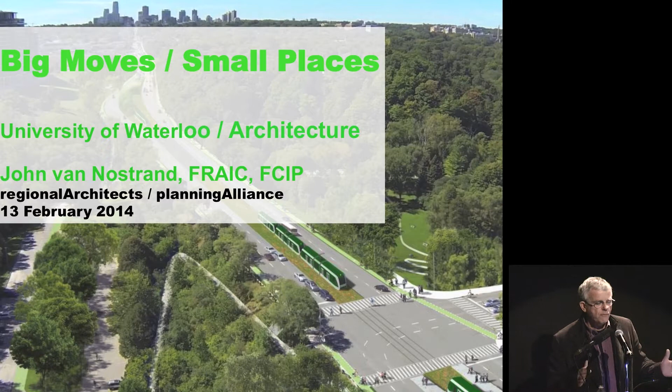So I call the talk Big Moves, Small Places. The regional transit plan is called the Big Move for our region—that's at one end of the spectrum, and at the other end are the actual places and properties affected by this. The whole project vibrates back and forth between these two scales.

This isn't a project done by my firms alone—Planning Alliance and Regional Architects—we also work closely with a firm called Brook McIlroy and with Antoine Grumbach from Paris. Those who know the T3 in Paris will be familiar with Antoine; he's the architect and urbanist who developed the T3, the new LRT around the perimeter of Paris, a pretty amazing piece of infrastructure. Antoine also taught me architecture in 1968, because all the serious young thinkers in Paris had to get out during the student riots, and he ended up, fortunately, at U of T for a couple of years. So we've known each other a long time, and I worked with him in Paris as well.

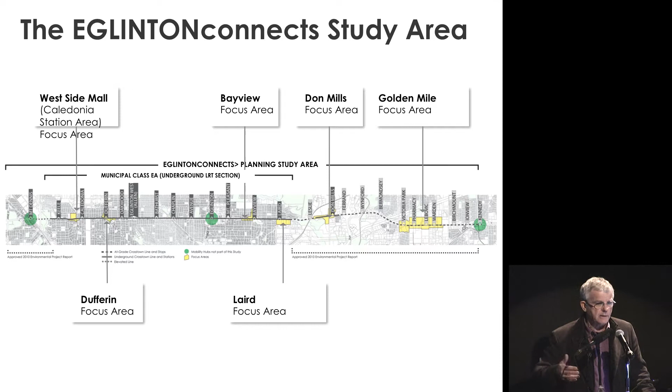It's been about a year and a half, almost a 2-year process, and is concluded now and goes on to the next stage, which is for Infrastructure Ontario to take it and develop the detailed plans and construction documents to build it.

The other reason I thought this would be worth showing you is to give you a sense of how projects like this get created and realized, and how they're represented to the public, just as a kind of exercise.

So when we talk about vision, it's an idea that will change along the way. We don't treat it as a fixed thing. So vision, testing our initial ideas, refining those, and then producing a final report.

And just to give you a sense of the politics of it—Toronto is of course fraught by politics—we deal with 12 or 14 different wards and different politicians, including some who are running for mayor now, and quite a spectrum of interests from a political point of view, not to mention a neighborhood point of view. So one of the things we did is have open houses inside City Hall, ironically for councillors, so they could drop in and see, up on the second floor of City Hall.

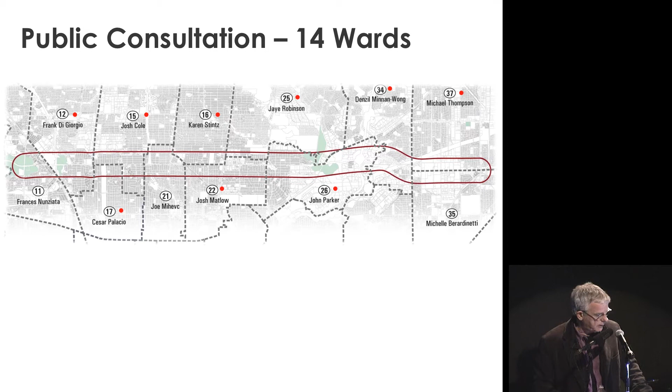And again, to be clear about the roles—who's actually building this, who's responsible for what. Metrolinx is responsible for the LRT, the design and construction of the LRT itself and of the stations, with some input from the city, especially in terms of the interface between those and what the city is responsible for, and what we were responsible for—the planning and design of a new public realm.

And streetscape, a transportation study from Black Creek to Brentcliffe, to look at the impact of the new LRT on existing traffic movement on the surface, planning tools for the focus areas, and the creation of ideas about zoning in a form that could be translated into a revised zoning bylaw. So quite an interesting mix of responsibilities.

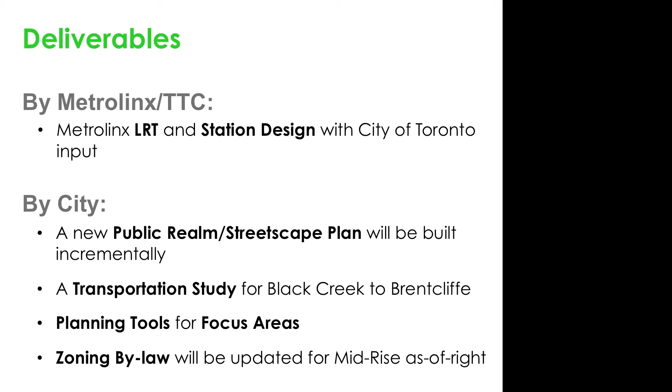It will probably redefine the way we talk about the city, because as you know, the city is either east of Yonge or west of Yonge at the moment—that's how people describe Toronto. Now we're going to be east of Yonge, west of Yonge, southwest, northeast of Yonge and Eglinton.

And in fact, at a regional scale, it runs from Lake Ontario right to the Niagara Escarpment. So it's a very important corridor, as we'll see in a moment, not just in the neighborhoods it runs through, not just the city, but also the region as a whole—hence Metrolinx's involvement at one level along with the city.

One of the pieces of work we did was on the history of the development of Eglinton, which has evolved from a country road between concession blocks, between two townships, into an urban main street. It spans the city from east to west, linking the Humber to the Don Valley.

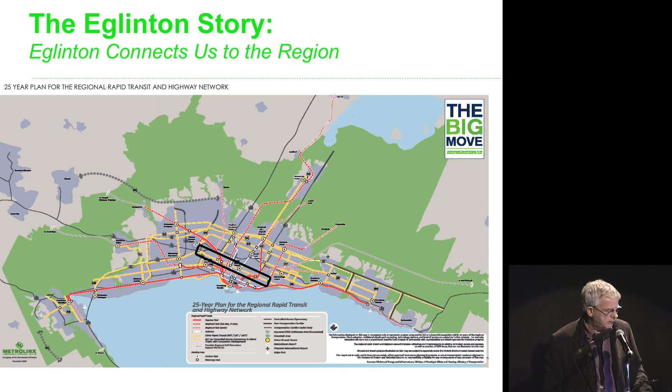So it has a very large-scale role for the city as a whole. You can see the black lines are existing subways or comparable order transit, and the red is Eglinton.

The dotted lines show where it goes above grade. At a city level, it's running from the lake over to the airport eventually, and the west end of it is actually reserved to widen out as a parkway to the airport, becoming a second major access into the airport at that end.

So the Golden Mile, the eastern end, the famous Golden Mile in Scarborough, right into Yonge and Eglinton, which is really one of the major hearts of the city, through Leaside, through Forest Hill—all of whom, at the BIA level, are busy trying to define the differences between their neighborhood and the others. So there's a kind of differentiated character that picks up too.

So at one end you've got a question of language here, because transit always raises this: the original Yonge line was built in a very consistent language of materials and design, using the same colored tiles, similar fixed sets of words, if I can call it that, to paint the line as a whole.

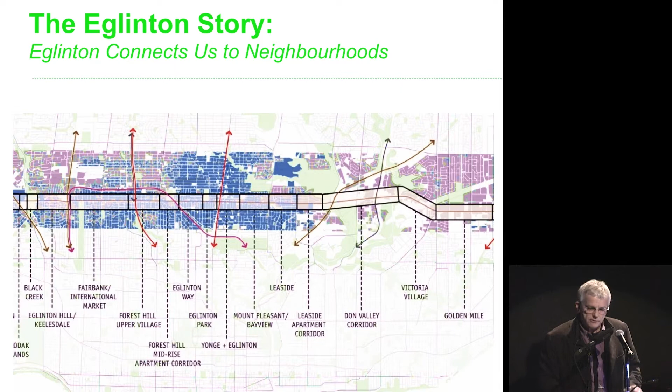And I think the challenge before us here is to try and do both at this level. That's what we're actually talking about.

So there's the sort of neighborhood scale street that we're dealing with, the DNA, if I can call it that, of the main street of Ontario or Canada for that matter.

That's currently under construction. They've been boring from one end, and we'll start shortly boring from the west end eastwards, and we'll start at the east end at Brentcliffe near Wilket Creek, boring westwards, joining somewhere in the middle.

You can see that this also paints its situation within the topography of the city. So you've really got a kind of two valleys at either end rising up to the high point, or the divide that happens actually in Forest Hill, hence Forest Hill.

We think that what we've always thought from the beginning is that this is not just about transit and service, it's also connecting us with our landscape. It's more, there is that magic moment on the Yonge and Bloor lines when you burst out from underground and come in through green, and then burst back in.

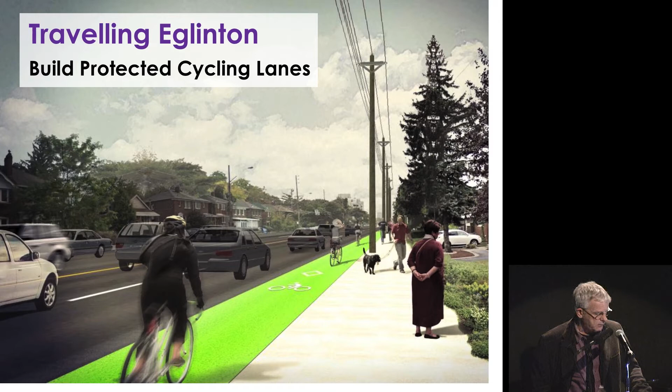And how could we widen the sidewalks and improve the pedestrian space throughout? And how could we not only provide for biking, but provide for protected cycling lanes throughout? Also, the other challenge was to maintain the existing parking supply.

One of the problems with one of the precursors, which is the St. Clair line, is that parking got eliminated from the street, certainly during rush hours, but got severely reduced overall, which is a hugely contentious issue with shop owners along the street who lost customers, and many of them still complain that they are. Unlike the Bloor line, where the train was offset, so there was a whole network or linear set of parking lots that complement Danforth and Bloor throughout, which is quite a different situation.

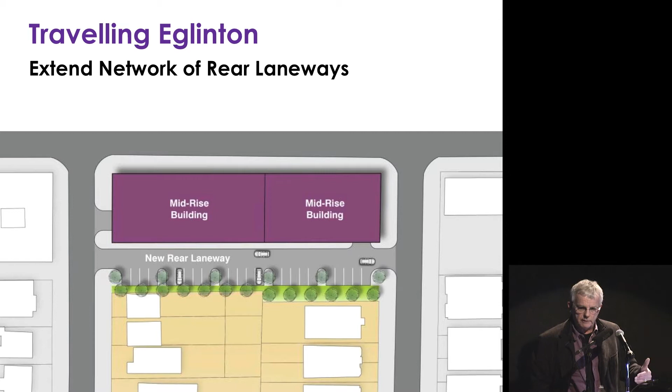So we made a commitment to maintain the existing parking supply along the street as a whole. One of the ways we looked at doing that was to provide new lanes and new parking behind the existing buildings to complement, and there were still spaces in front as well, but to sort of keep that ratio up. This just gives you diagrammatically what's really going on.

There's a typical existing cross-section of Eglinton as it is. Basically it has 2 bus-only lanes through most of its length, and then 2 travel lanes, and the center turn lane, and relatively narrow sidewalks once you've got all the furniture into it.

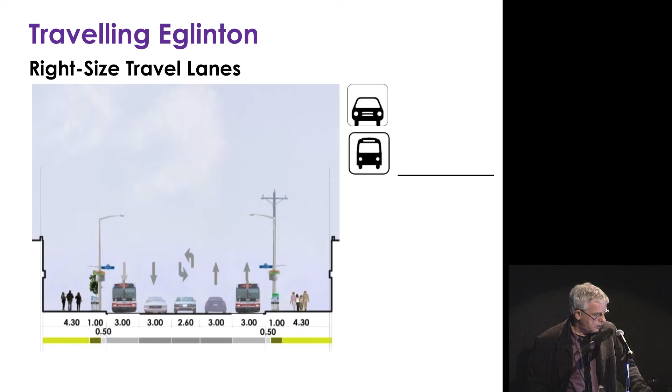So first of all, just to give you a sense of traffic, this is numbers for the AM period, what number of people are being accommodated. In cars, you're getting 700 to 1,300 people per hour being accommodated, and in buses, 1,200 to 2,600, for a total of 2,300 to 3,600.

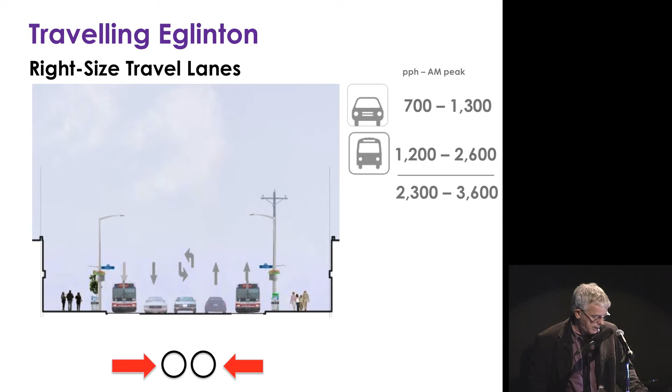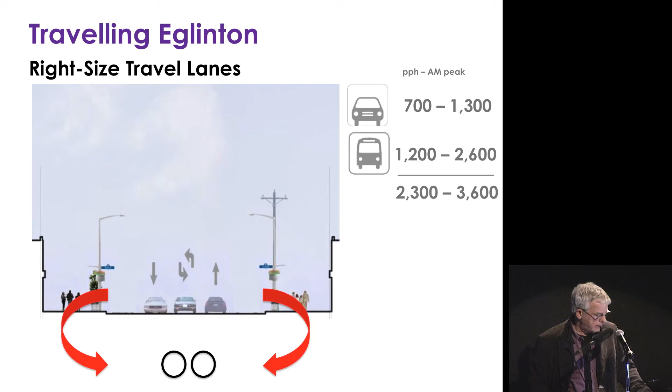Then, with the introduction of the LRT underground, that means we can eliminate the buses. There will still be buses on some portions linking through certain areas, but basically we're getting rid of the bus lanes because they're being replaced by the transit. And that also then allowed us to begin to look at widening the streets.

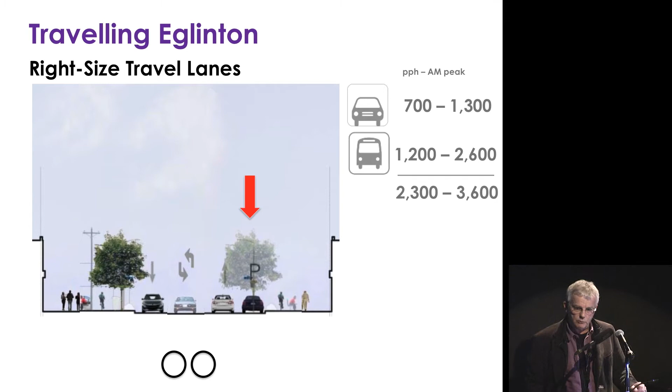This is something that had previously been done - one reason we were selected for the project is that we were responsible originally for St. George Street, which widened the sidewalks and reduced the travel lanes. We did traffic counts there that included pedestrians, as were done for Eglinton, and rebalanced the street to meet the pedestrian load, because the vehicle space taken up in the street was always much bigger than the actual percentage of people using it in vehicles. That allows us to begin to think about planting trees and introducing cycling lanes on one side and the other, and possibly considering parking as well on one side or the other.

And then that in turn allows us to improve car travel, actually the car capacity somewhat, from 900 to 1,600 people, and then to add 5,000 to 7,500 in the LRT itself. So this is just trying to give you a very simple order of magnitude of the increase in capacity of the system and the street as a result of the process.

So that results in a revised cross-section, a typical cross-section that looks something like this: sidewalks on the outside, the tree zone, which is also used as pedestrian space, so we've widened the sidewalk to almost 5 meters. The bicycle lanes on either side are protected, and then there are 4 travel lanes and/or parking lanes that can be used depending on the particular configuration.

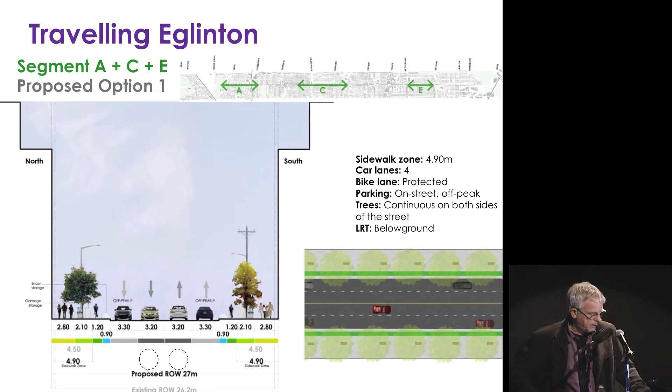That cross-section was then adapted to the different traffic conditions along Eglinton. Some parts, for instance around the Allen, are very busy and are already taking a lot of traffic, while there are other areas that are very quiet and don't deal with much traffic. So we were able to maintain the continuity of the cross-section of the trees, the cycling, and the traffic, but actually adapt it to varying conditions traffic-wise along the street.

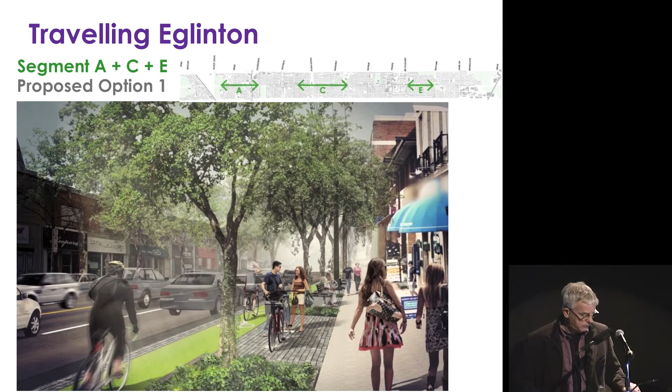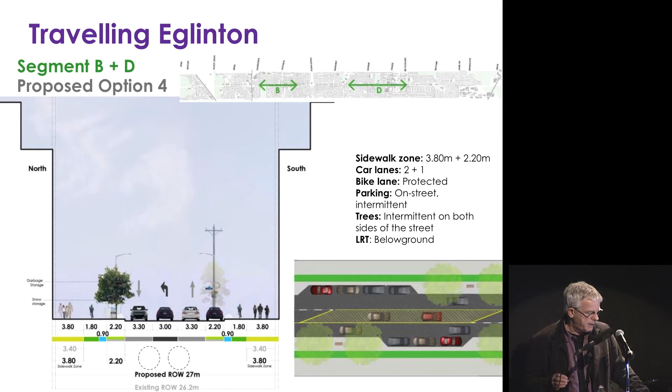There's another segment, and you can see above where it is in the city, that's Spadina to Mount Pleasant. The section proposed for that keeps a turn lane in the middle, provides some parking to either side, and keeps the trees.

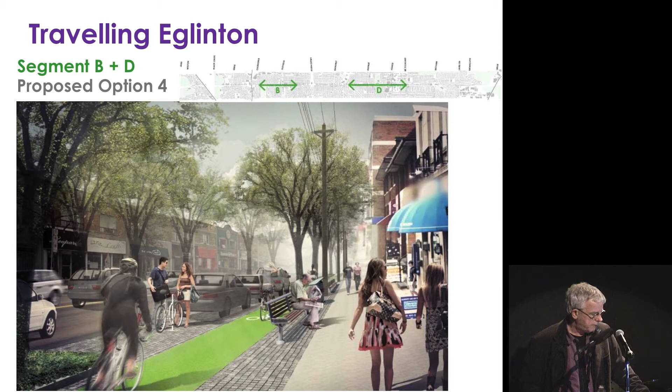So again, a similar condition, or a variation on that theme.

On the greening side, again, I go back to the fact that the line is cutting through some very significant green spaces. That's both major ones, the Wilket and Don on the east and the Black on the west, but also some historic streams in the center there and other park sites alongside. There you get a closer look, overlaid on the existing valley systems and green spaces.

So first of all, the ravine landscape was simply about celebrating those entrances and exits to the valley. In fact, now there are stations.

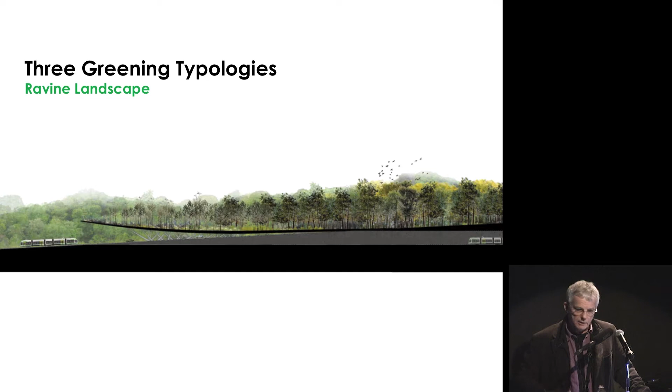There is a station. There was quite a controversy over the station at the Leslie Street end, which has now been included so that the subway will actually provide access into the valleys through a stop, giving people the ability to get out of the LRT and into the valleys, if I can put it that way.

And that showed a notion of, if we were bridging, how we could link the bridges down into the valley.

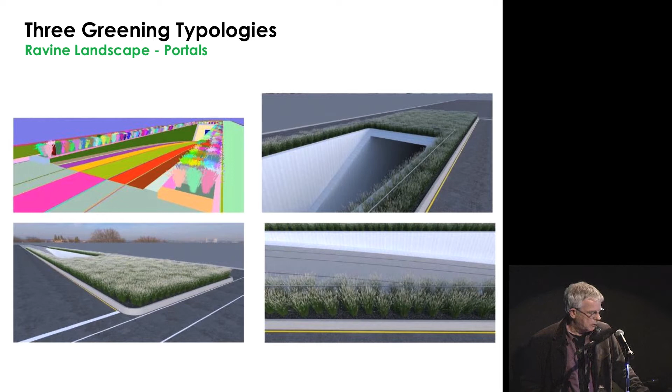Provide space. And then these are some notions of the portals, the entrance points into the valleys that will be created where it bursts out of the ground.

Then the next part of the greening was the area of the street where this LRT is at grade, which is quite a different condition than being underground. This is, in fact, the T3 in Paris that Antoine was involved in. So that's the street before it was built, and that shows it after.

The extraordinary thing the tramway did was it was sold, in fact. It was a terribly contentious project. It's not just Toronto where transit's contentious. It was very contentious until the point where Grumbach said, look, we can actually green the right-of-way.

We can plant wildflowers in it. We can introduce it as a major green space in the city, a continuous green space. And there you see it, in addition, very significant. In fact, we had to make quite the case for doing that here. It's still, in a way, an ongoing case, but I think we're going to get a chance to test it.

But this is just to show you that the notion of using the transitway as a greenway is quite popular and has been used in a wide variety of other places. This is part of our propaganda to say why we should have it in Toronto, of course. And that sort of shows what that would look like.

So on the top side, you get what we call the Green Mile, which is in fact the Golden Mile section, the longest continuous piece where the transit's in the center of the street, running down a treed median, with trees to either side. And then we see it running down to the Leslie station below, running through the valley there.

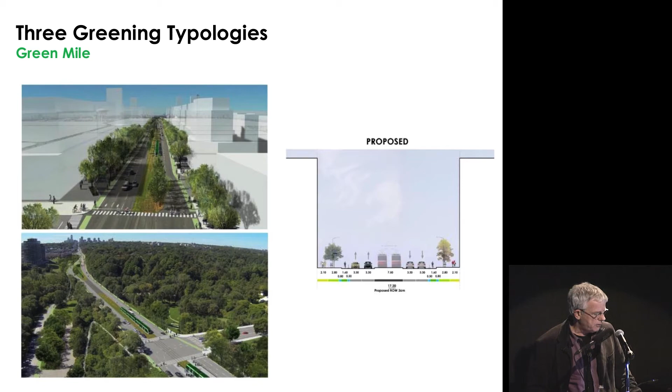I think this just shows you the kind of gradual buildup. Another whole aspect of the project is that it's not all going to happen at one time. So there's a whole issue of how it gets phased. What can you introduce first? How can it be done additively over time as money becomes available?

We gradually build up to a public space because it's a huge project that's already, I think, got a $5 billion budget, just basically around the basic infrastructure and the transit. So to begin to make an argument for adding public amenity here is a challenge. The way we address that is to say this is something that can happen over time. The Parisian one, per mile, is probably four times the cost of what we have to spend here, just to be clear.

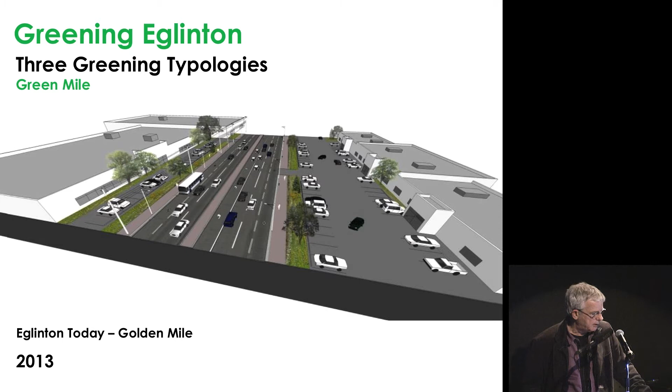So this shows a sequence of how the street would be built up. There we see the transitway down the middle. Well, that's actually the existing situation today.

That shows the introduction of the transitway at the outset, the bike lanes to either side, the wider sidewalks, and the tree planting.

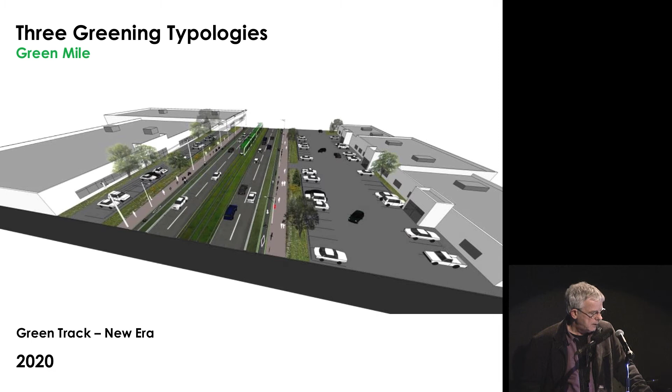The greening of the centerpiece, the median, the introduction of trees, the notion that those will in turn catalyze new development along either side, because as you'll see in a moment, we're also rezoning the lands along either side for intensification or higher density use.

So that we get a final result, also using the stations themselves, the platforms, as green space.

I didn't tell the end of the story in Paris, but the one move was the promise that the tramway would be an agent of green. But the big promise that was made was that you will wait for the tramway under trees.

So you can see that what is actually going to happen here is that the roofs will be taken out once the trees are big, and you will be waiting under trees. And this is one of the stations along it.

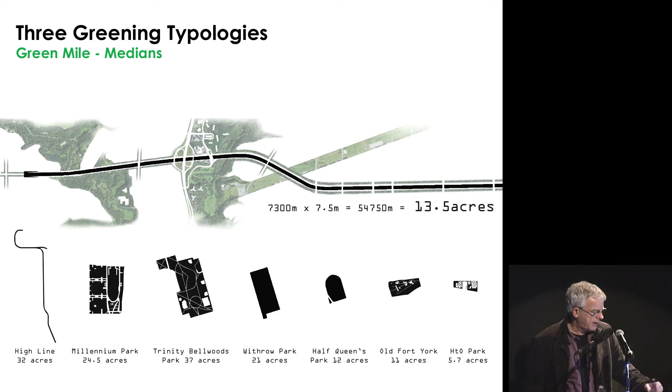And then some sense of how that greening relates to other green spaces in the city, where it would provide, just on that one section, 13.5 acres, and how that compares with other open spaces in the city and other cities that we know.

So finally there's the street itself, the main street, and there are opportunities there for greening, with street greening, the open space around the stations that we worked with Metrolinx on and are still working on, the open space within new development, and the existing open spaces, and how to link those into this whole system.

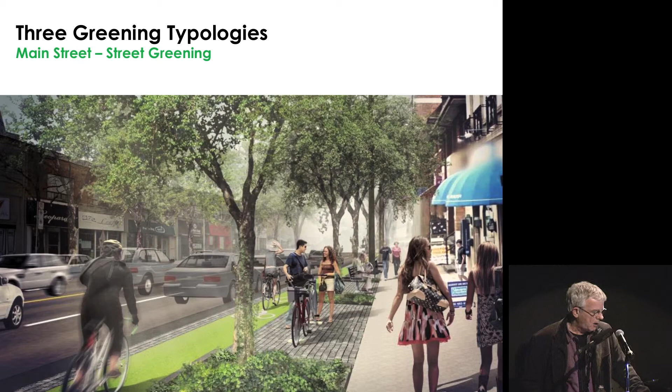So we've talked about the main street itself and how that should emerge. And there's a whole piece of work done on enlarging the planting areas for trees, making a proper base so trees could grow to a much greater, more normal height, through different practices.

Making use of these kinds of open spaces—trail systems, skating areas, public open spaces along the way—linking those in with the street itself, extending the greening of the street to adjacent properties.

And then the stations—this is the Allen station, some preliminary work on the Allen station at Allen and Eglinton, showing what it might look like from the air.

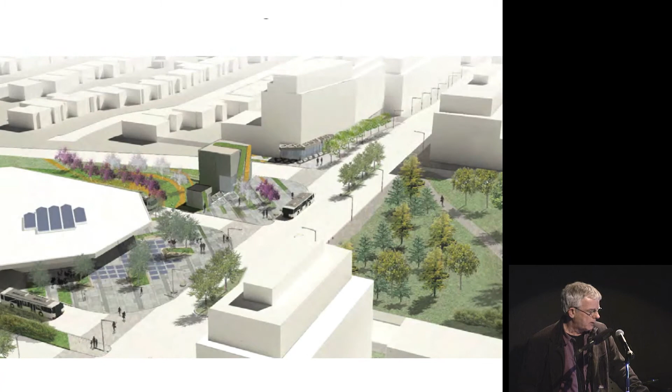So you can see that it involves pieces of land on both sides of Eglinton, and you get a sense that those will also be very special public spaces.

And I think our notion was, yet to be evolved, that these would be a series. So there are a series of stations, a hierarchy of stations, and a matching hierarchy of public spaces associated with each station, all of which can evolve over time.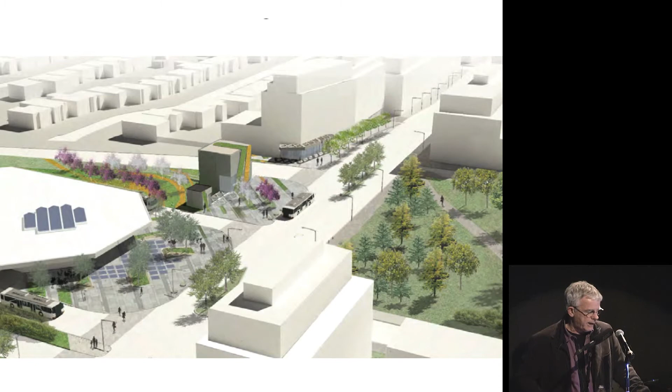And so you'll get, as has happened on the Yonge Line, the major regional stations happening first, some of the major city stations along with them, then the smaller city stations, and then the interim stations. At each point, an open space is included along with the station.

And then how those station sites could be planned to evolve over time, along with the station itself.

And there's a whole issue about the stations: are they finished primary structures that remain intact as stations, or are they simply starter stations that can get absorbed into the density likely to come to the station over time? Another major issue being dealt with at a station level.

And then how do we make sure that new green spaces are added with the new public places that are developed along the street?

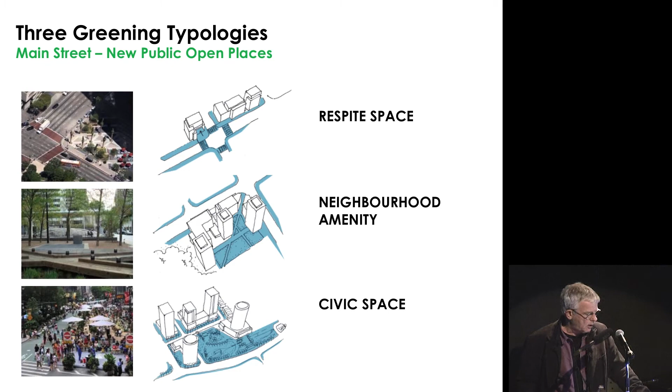In terms of building Eglinton, that is the zoning for the street, the city's objective from the beginning was to use Eglinton as an agent for the introduction of mid-rise building.

This is another major and evolving issue throughout the project. The notion was, in the beginning, to zone the entire street for mid-rise development only. That is, development the height of which is defined by the width of the street itself, which means there'll be 5 hours of sunlight on the far side of the street from any development.

That's a kind of basic rule the city followed in its mid-rise guidelines. What's happened throughout is we've realized the street is a very diverse place, and there are actually some areas that probably shouldn't be touched, or are unlikely to develop at all, or already have some integrity from a heritage point of view. There are other areas where mid-rise might work, but around the stations and other areas there's a real need to introduce density to take advantage of the transit itself, and also to help pay for the transit indirectly by raising the value of the land and the tax benefits for the city over time.

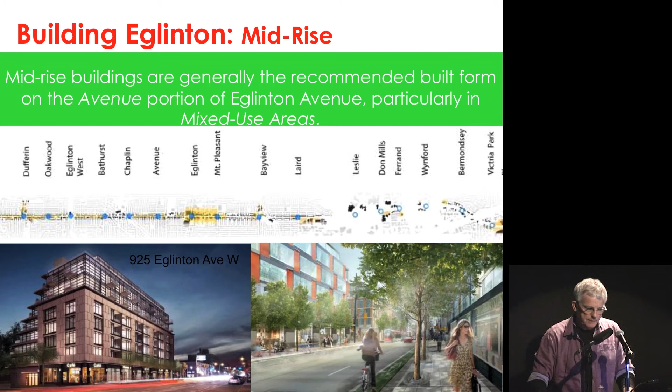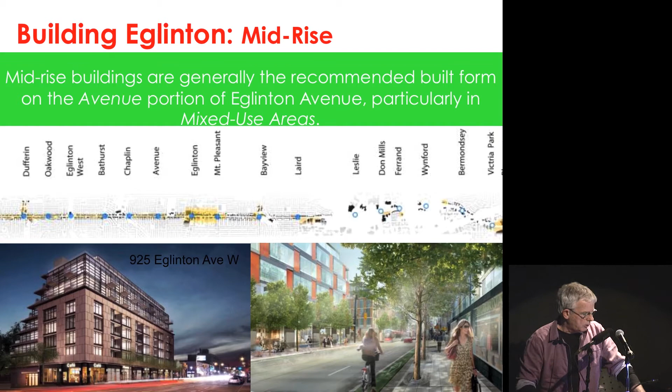So the city's approach has evolved from a kind of mid-rise to a variety of heights. At the beginning, you can see the yellow areas were the mid-rise areas we were asked to look at in detail, and we're looking at a typical mid-rise building there and other typical mid-rise buildings that were touted by the mid-rise study that introduced this to the city in the first place.

What happens in the end is we're saying there'll be mid-rise in those mixed-use areas, largely between stations. There'll be locations where building height should be limited, because of heritage or other value at the heights they're at now, more or less. And there should also be locations for tall buildings, which tend to be around the stations themselves, and we'll see in a moment some of the focus areas which focus on particular station sites.

The notion of mid-rise is exactly expressed in this diagram, where you get to build basically 6 stories. Again, it's all related to the width of the street. In a 27-meter right-of-way, which is the average for the street here, the maximum building height is the same 27 meters. Above the 6th floor, there's an angular plane of 45 degrees that ensures light falls on the far side sidewalk 5 hours a day.

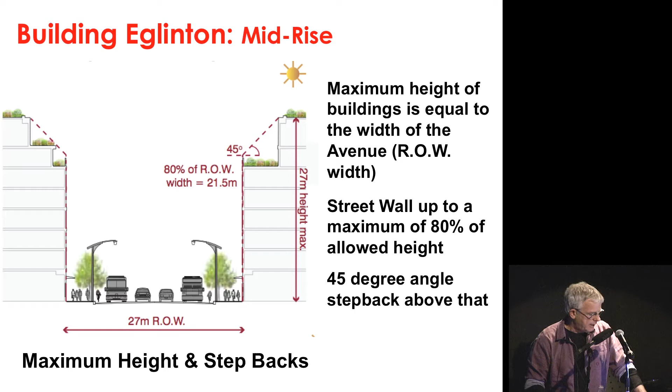The street wall can be a maximum of 80% of the allowed height. So there are the sun diagrams of the street over time, and the rule is that you've got to get at least 5 hours of sunlight on the sidewalks at all times.

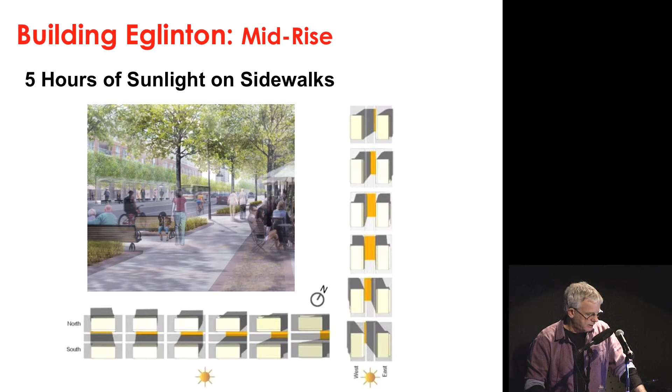Then there's a whole issue of the relationship of the mid-rise to the lower density neighborhoods behind, governed by an angular plane from the far side of the rear property line, or the inside of a lane if one exists, and certain setbacks that ensure light gets to the properties behind.

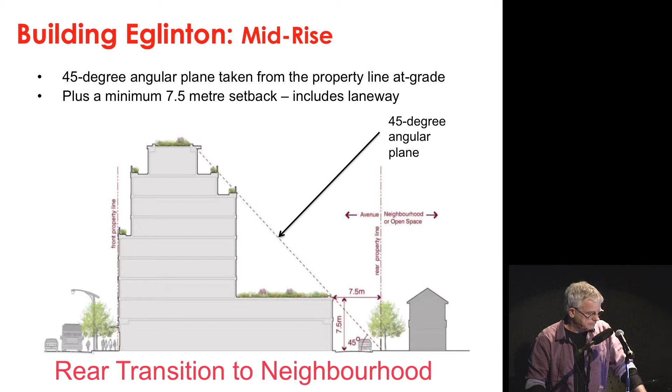And then there's a servicing and parking issue. If you looked at the zoning volumes and maxed them out, we could potentially be adding 400 to 500,000 people along this line, just to give you a sense of the densities we're talking about. That's going to involve a lot of new building, new servicing, and new parking.

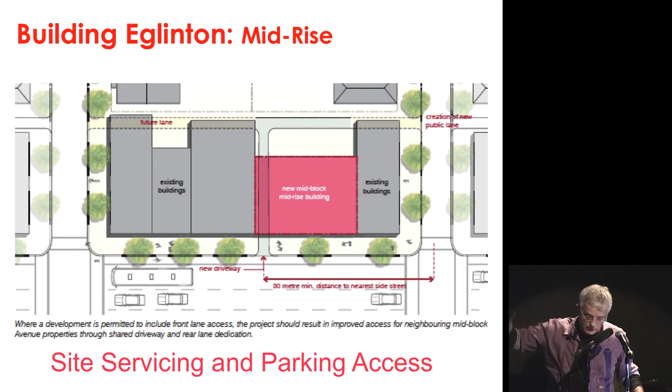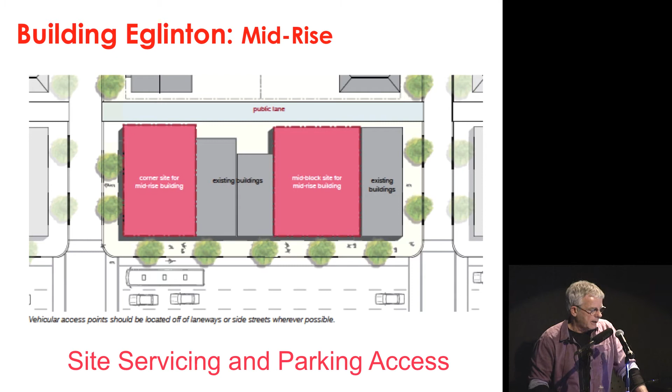There's also a sub-notion of introducing lanes that evolve over time in association with new building. You could designate a lane, starting as a new rear lane on the mid-rise site, eventually resulting in a permanent public lane in the back, which could at least be used for servicing and could also be used for parking. That's part of the evolutionary process.

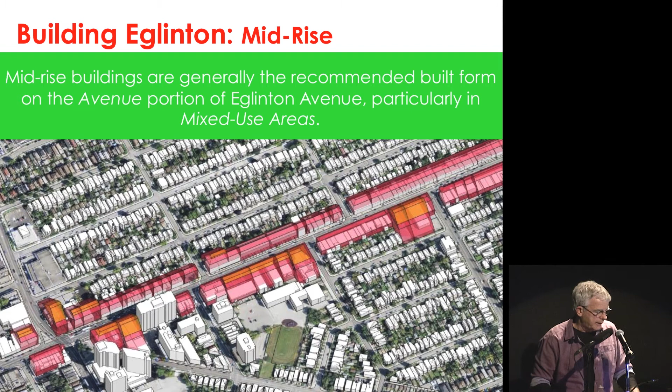It gives you some sense of the work done on the big slopes back to the neighborhoods behind. There are neighborhoods where a 4-story maximum is being set because the BIA is insisting on it. There's a whole character issue—the character of the neighborhood is thought to rest with the heights and building types in those areas. There are shallow lot depths as well, so you can't really build much higher, and the character areas require that kind of massing or DNA.

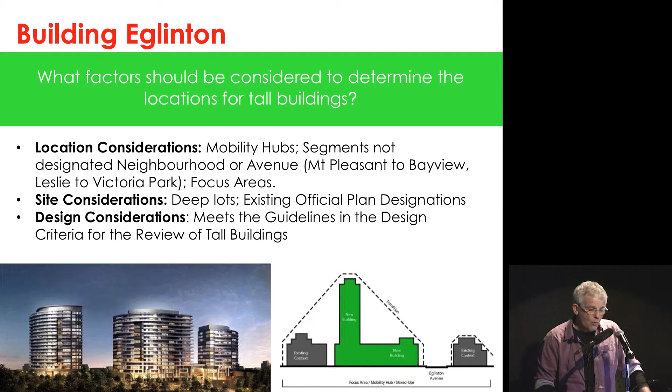Then there are other areas where taller buildings are particularly true of major intersections, where of course there are stations, taller buildings would be permitted and could be permitted, also with their own angular planes in terms of light access to the street.

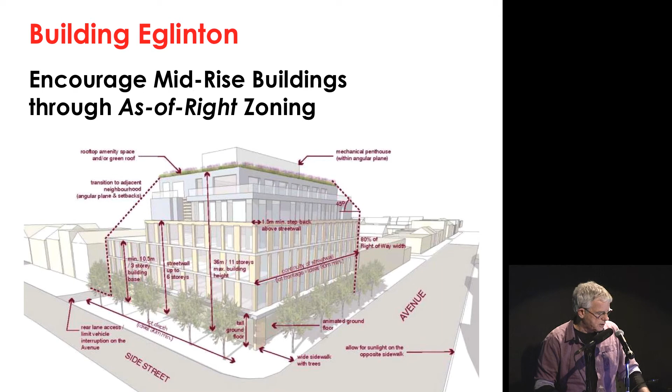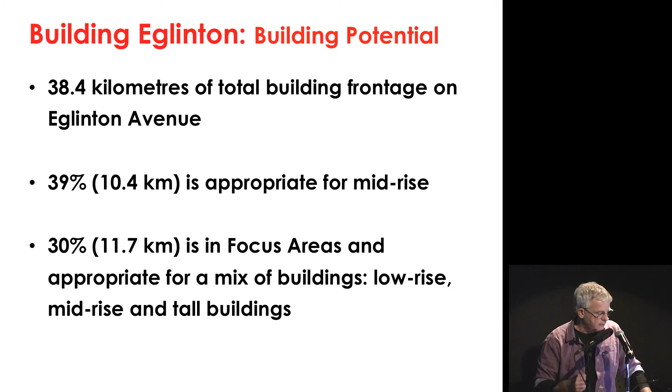So there's 38.4 kilometers of total building frontage on Eglinton, and about 39% of that is appropriate for mid-rise in the end. 30% is in the focus areas, and I'll show you those in a moment, what the ideas for those are, and they're appropriate for a mix of buildings—could be low-rise, could be mid-rise, but could also be high-rise.

And the whole notion of making sure that we make stations, at least from the city's point of view, is that you make stations that can be integrated into buildings later on, limiting the money spent on those up front, and waiting for them to be developed as part of the larger buildings.

Because in fact many of the stations—for those of you who know the Yonge line, I get on at Summerhill Station—that was actually set up in 1954 as a temporary station. Even Rosedale Station is a temporary station, as it was thought then, because it would be under a building eventually. And there are many buildings that have been built over those sites since 1954.

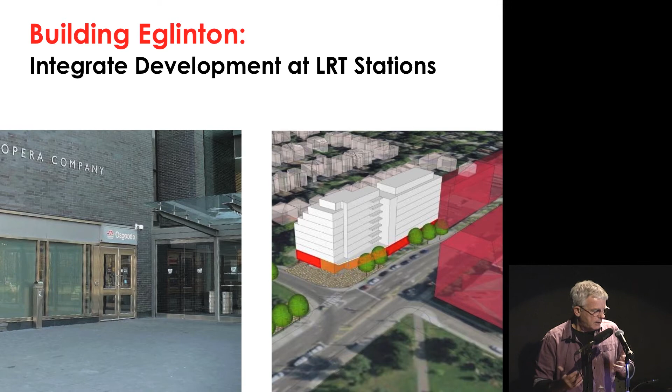So rather than go into trying to make an architectural statement, as is being made on the Bathurst line or the Allen line, the notion was to actually use the stations to catalyze growth rather than restrict it. This just gives you a sense—and we could talk about all of these in a lot of detail—but just gives you a sense of what density might look like at the focus area.

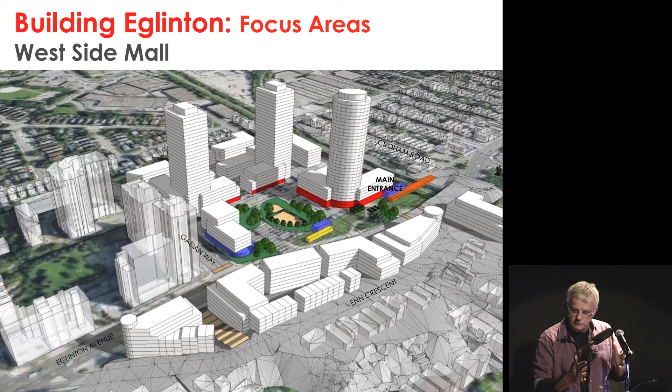So this is the West Side Mall. It's on the west side where there's actually that orange bar to your right, which is in fact a GO station. There's a GO line that meets the LRT at that point, so it's a very high transfer point, lots of people, and lots of potential for long-term density and a mix of uses, such as is depicted here.

And a sense of what that might look like. So again, that's trying to paint a kind of final version of that. This is going to happen over many years, but you've got to look at the kind of final version to know how to get started.

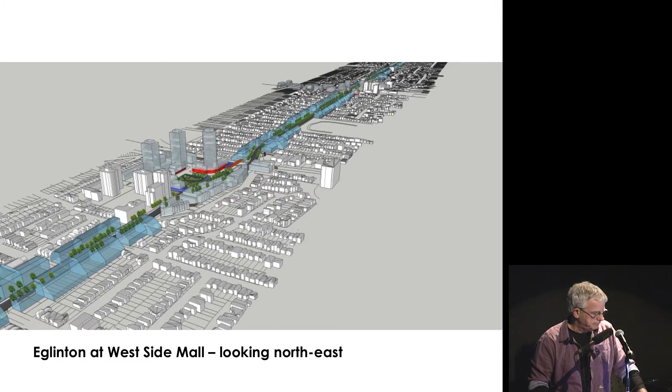And you can see that idea too of making sure that a park is established right from the beginning—open space and association—so that tone is set right from the beginning as part of the infrastructure of the line.

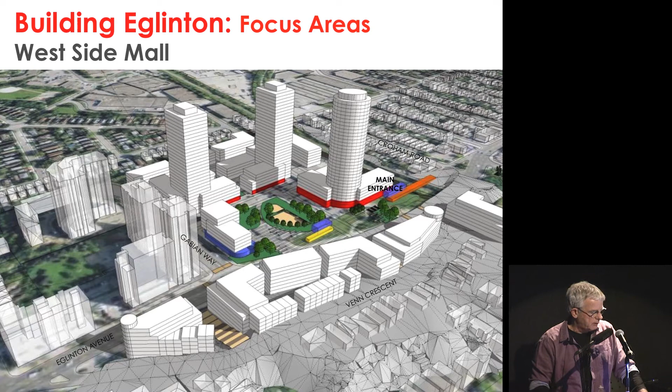So that view, we go to Dufferin and Eglinton, and note that's looking to the northwest, up Vaughan Road there, which comes in at an angle at that point, as you probably know if you know the area.

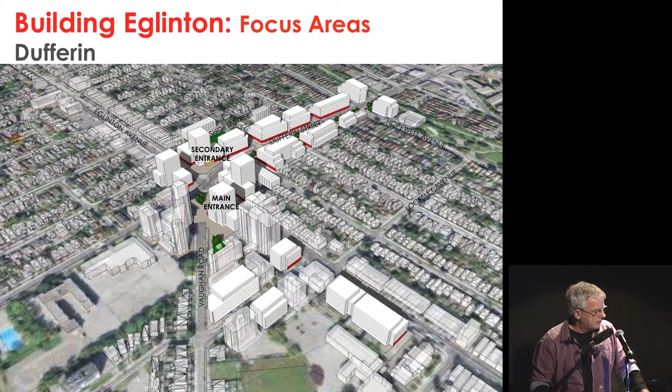And the notion that density could extend up to Dufferin Street, because that's the potential new greenway that's being established along that former rail track there. So again, a mix of higher and mid densities—a look from Eglinton and Dufferin looking west.

Bayview site, which is now a big shopping center on the northwest corner, a plaza on the northeast corner, but also a point of entry into the valley system, and Leaside High School grounds there, which are a major potential asset.

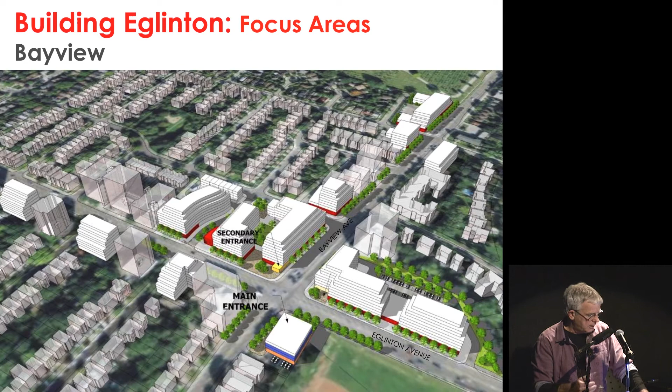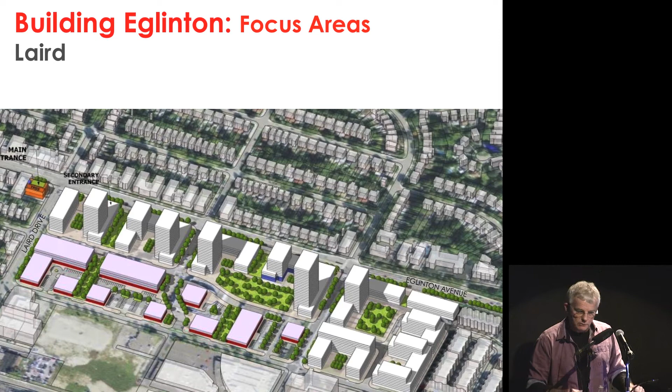Laird, which is in fact an employment area. So this is deemed to be the employment being kept along the Laird frontage, and then potential residential set inside that.

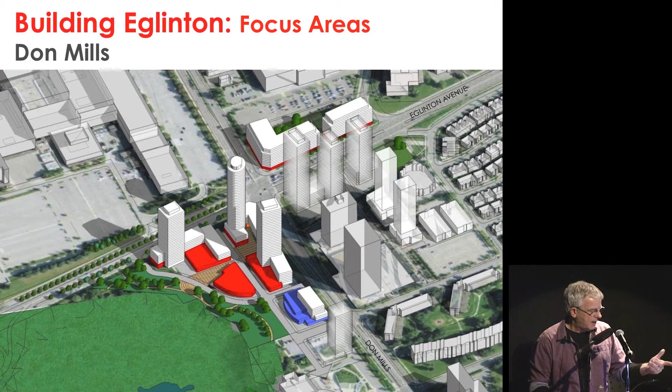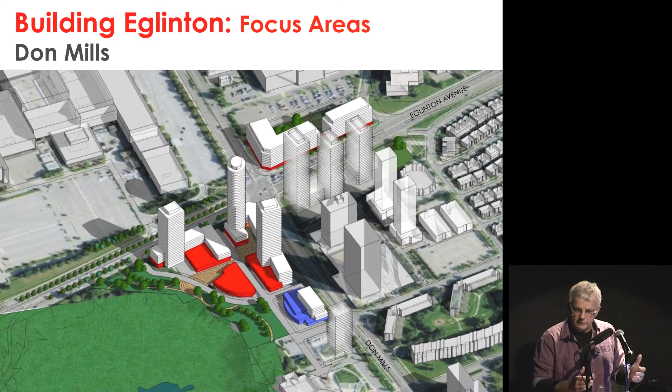Don Mills, potentially a very dense site. So we're looking at the Science Center in the lower side of the slide here—another major entrance into the valley system from that station, as well as access to higher density sites around the corner.

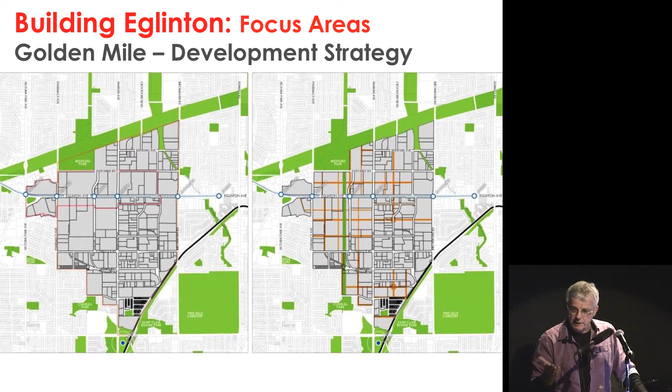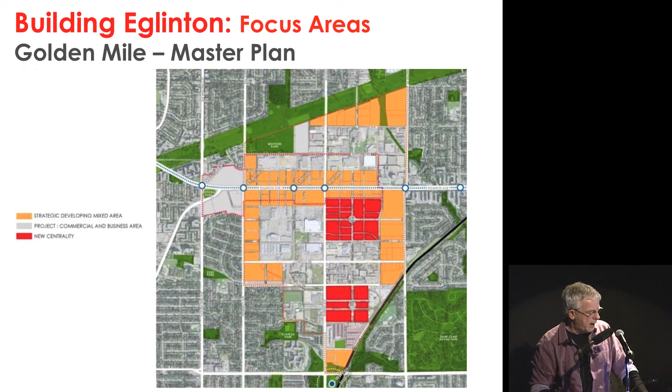This is a larger, very large scale planning notion. Eglinton's at the top there, with mixed use along it, new workspace or employment space in red in the middle, and that mixed use perimeter.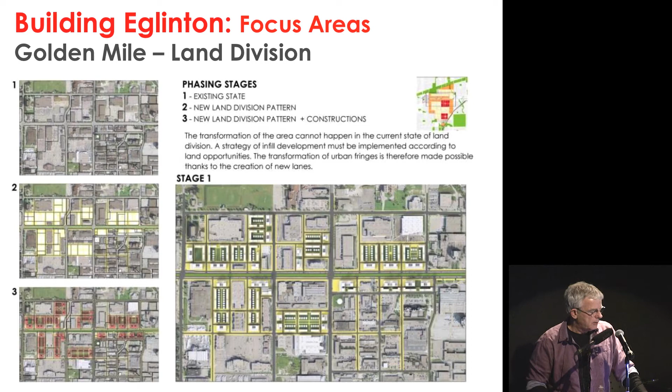These are patterns of land division and how that could happen over time. I think, again, this is a key part of the project: how do you plan for the time element, and how do you learn from the Yonge line and the Bloor line, for example, and the St. Clair line more recently.

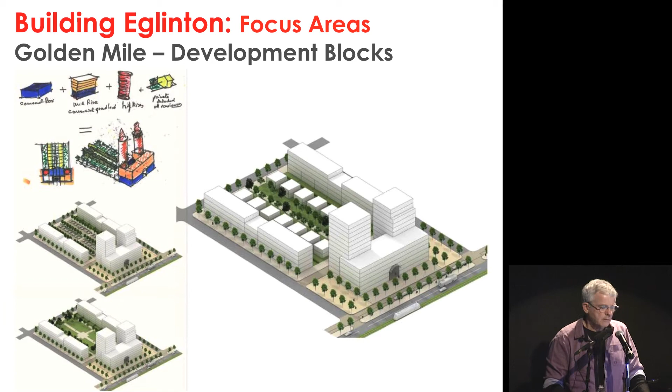We developed block types that aren't necessarily all high-rise, but involve a variety of scales, from duplexes and quadruplexes, villas if I can call them that, to mid-rise to higher density. So we actually create a mix of affordability and a mix of incomes that are encouraged to come.

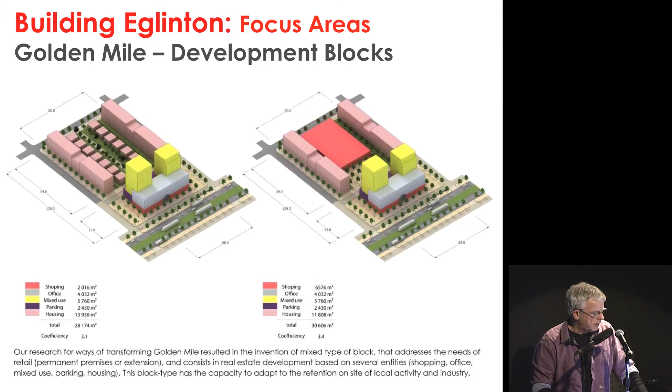These could all take much larger explanation than I have time for, but these are all block types that we developed that could evolve over time in this place.

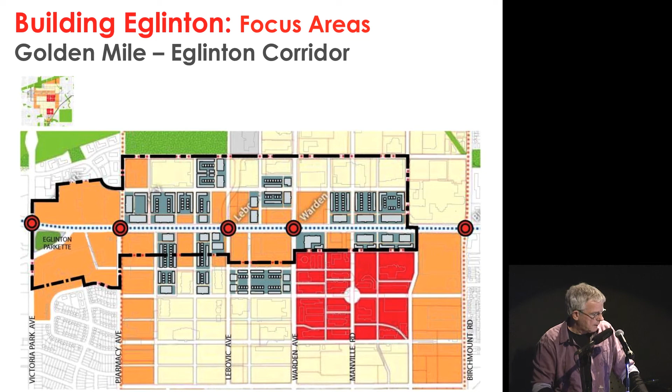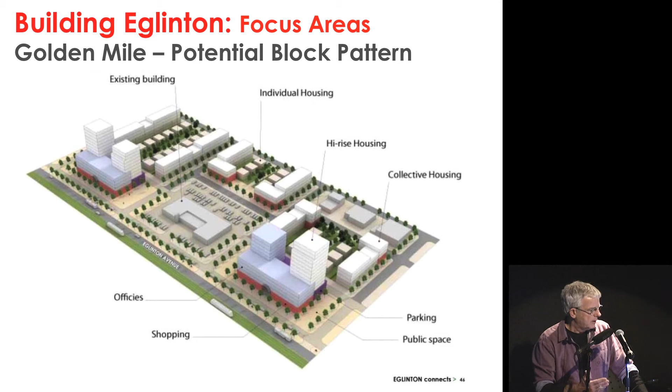So there's a look in sort of midstream of evolution. There's an existing building still in the middle, and buildings on either side have been developed.

So we're now thinking about implementation. Just to give you a sense of that, really what's going to happen here is that the line itself will be put in, and the land around the stations will be developed first. So those dots are the pieces of street that would be developed with each station.

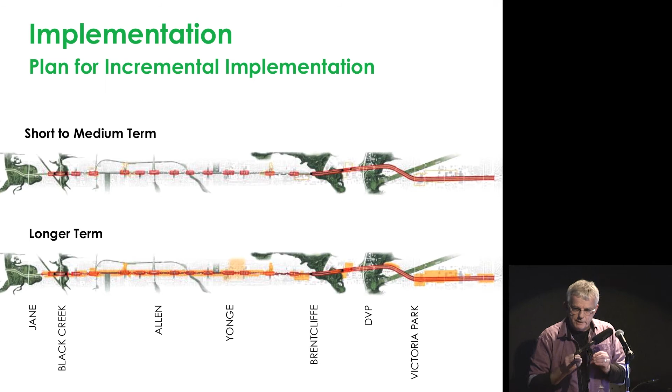So it starts around the station and then grows out in between stations over time, is the notion. These are drawings we did that looked at how that evolution might happen over time and density—they're far too big to really see in detail.

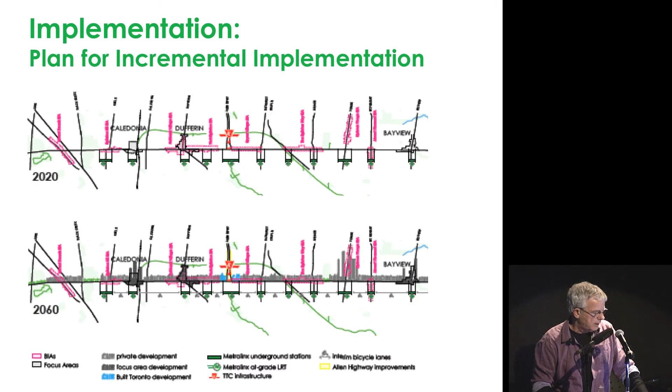You can see, for example, at Yonge and Eglinton, the very tall buildings on the right side, and we see the other taller sites as they evolve at Dufferin and Caledonia, Bayview, and the interstitial spaces filling in between.

So I think I'm just going to end with some reflections on where we stand in the process and what the challenges are that remain.

The last time I was here, in fact the series before this, I think, Don focused on the whole notion of utopia versus agency—the utopian planning ideas versus real life, and how does real life actually happen. I think that's a very relevant issue here, which hasn't really been explored in a lot of detail.

It's fine to talk about mid-rise density zoning being applied over strips of land, but if it can't be realized on a property-by-property basis, it means entire blocks have to be assembled. And I can assure you, once they're assembled, developers are not going to want to build mid-rise. So there'd be enormous pressure to go higher.

So I think one of the big issues is how are we going to empower individual landowners and small builders to participate in the process? That is not clear yet, and it's certainly an area we're extremely interested in. We're actually working on that independently at the moment, because I don't think it really got addressed in the project itself.

So how can incremental growth be planned for and encouraged? As I talked about in the talk I gave here previously, I think we're really at a really interesting point in history. The first half of the 20th century developed on a largely... it used to be a bad term.

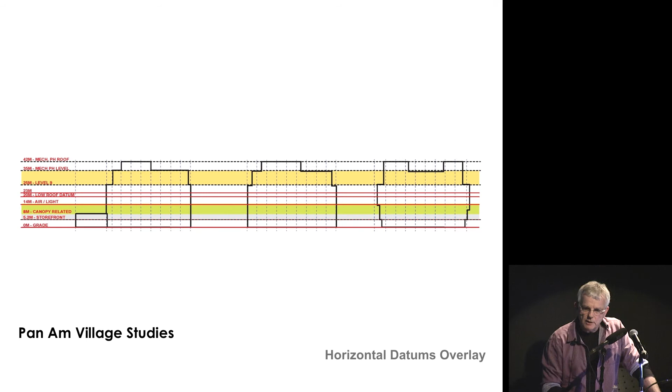But again, all built piece by piece. We did some work on this just to say that it's not all thinking. We submitted a scheme for the Pan Am Village, which tried to build on the idea of Front Street extending into the village itself, by analyzing Front Street's datums, the various datum lines that defined it, anthropologically or systematically, using those datum lines to define new building profiles within the village that could be built by individual developers.

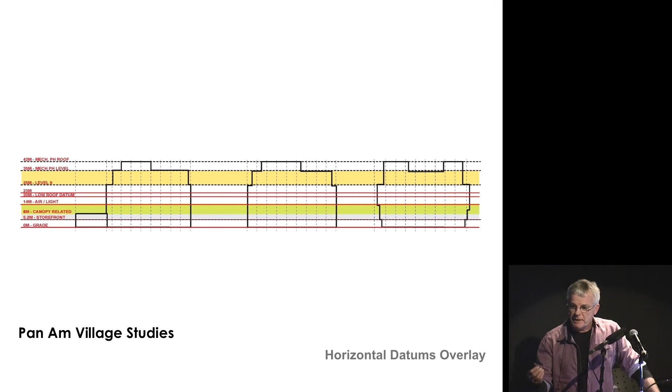It happens that the buildings are getting built by three developers to look like they were built by many developers, but we were trying to be genuine in our proposal, so that you would create a series of buildings that could form a street wall in the long run, but could be developed on an individual basis.

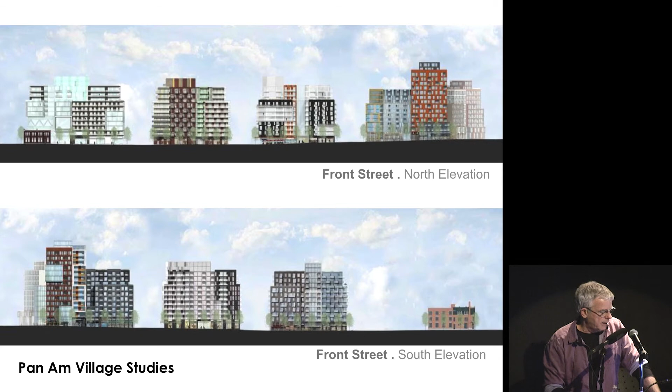So there is our zoning diagram of how that could happen. The Dutch have been onto this for some time, and these are streets and places that are made property by property with some very simple rules. So I think it can be done.

I was just talking with Antoine this week, and he told me there's a new rule in Paris, which I thought was fantastic and might be relevant here: Paris has just announced that every property can build an additional 40 square meters of space as of right. So they're freeing all property owners to start building again themselves, which I think is indicative of the way the world's changing.

What a wonderfully simple way to kick that off. And what would we do? How about we do that here? It would be fantastic. Mid-rise is happening, again, as Pam told you, and I think it can happen and will happen. But you notice that it's by already high buildings, so it was fitting in with an existing situation.

Finally, I think one of the shortcomings of the work done today is just looking at the street itself. In fact, the street serves a kilometer—it's the main street for communities that extend a kilometer on either side, with the next streets up and down two kilometers away. So you're actually serving an entire band of the city, and I feel the city has an obligation to think about the impact of this street on that band as a whole.

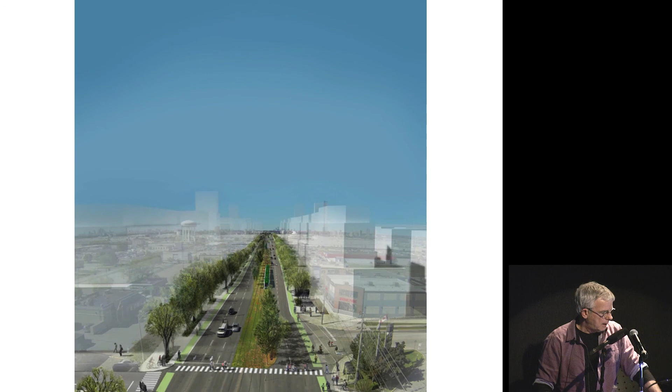That's my talk. Thank you very much.

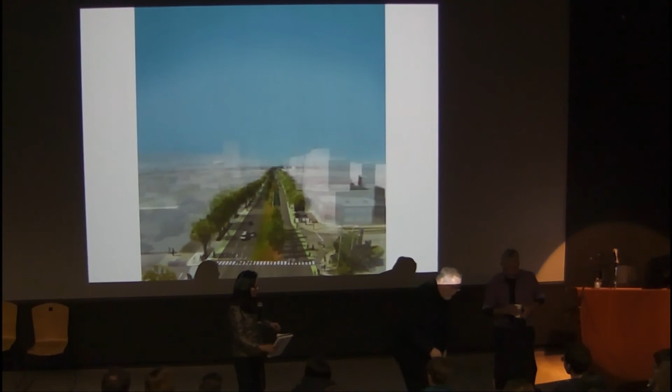So first of all, John, thank you very much. No, don't go away, John—you have to stay up there. John, as some of you may or may not know, is a very passionate man about cities. And it's actually my honor to be the provocateur on John's presentation, because John and I have had many passionate discussions on a lot of city issues. So I'm delighted to know that John gets terrified.

The first thing I'd like to ask, in the case of Eglinton Connects, what you present is almost a 2-year process, and what you're presenting is the conclusion of that. Your firm's client was the city, but at a piece of infrastructure of this scale, $5 billion, there's more than one client. As the architect, the planner, the idea maker, tell us how you drive the idea to realization, and how you deal with it when you see the idea, or a version of it, isn't going to fly, or is going to fly. Tell us how that process unfolds, because I think it'll be interesting for students to understand that, as much as what you're representing is how it turned out. Why did it take 2 years to get here? I could have done those drawings in a studio with a few all-nighters. Can you help folks understand that, because I think the process is so critical.